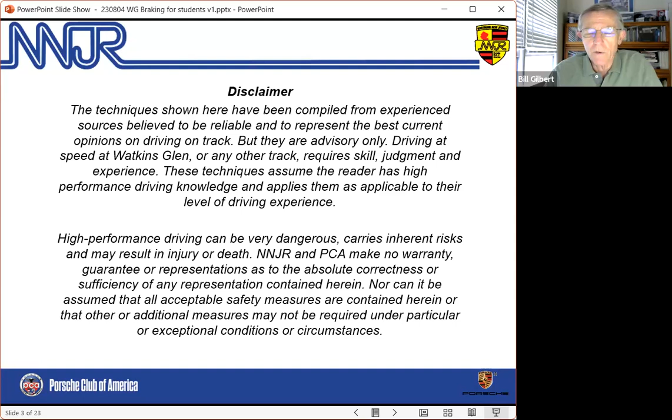Today's session is targeted for student drivers, although I'm sure all drivers will find some useful ideas here. But as always, before we get started, the caveat that everything we've put in here we think is good advice, but you use it at your own risk. Just like when we're on track, everything we do is at our own risk. So with that said, let's dive right in.

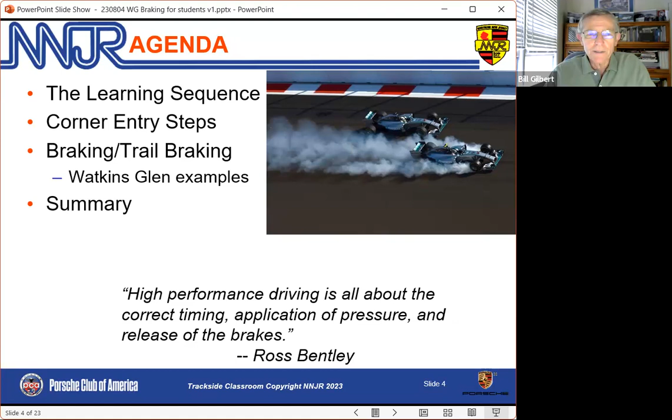Here's what we're going to talk about today. We're going to briefly talk about the learning sequence, the proper way to focus and prioritize when we're on track. Then we're going to take braking apart a little bit and look at what the corner entry steps are, and talk specifically about braking. We'll use some Watkins Glen examples today, but these techniques apply to any track. There's nothing specific to Watkins Glen here other than a couple of examples. And at the bottom, a Ross Bentley quote that's probably more applicable to those of you with more experience: braking is where the difference exists between the really good drivers and the rest. So with that said, let's get going.

This is what I've called the learning sequence - the sequence of priorities when you're learning a track, learning a corner, or even trying to get better. So what that means is that if you're a new driver, you're going to mainly focus on learning the line. And until you get the line figured out, everything else is really secondary.

Once we have the line, then we want to maximize our exit speed out of the corner consistent with safety. To do that, we find the best point to get on the gas, the throttle application point, and the best point to put our foot on the floor, the wide open throttle. And then if we're learning, the last thing we work on is braking and entering the turn.

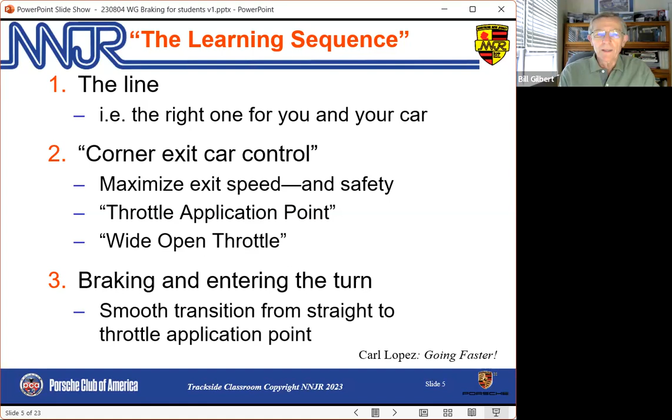So while we're talking about braking today, as if it's the only topic, it's not. In the sequence of learning, it is less important. But that said, as you are learning and you've kind of got the line figured out, there are some common mistakes that we'll explain how to avoid, and that will help you learn faster when you're on track.

So some basics I don't want to overlook: you have to be seated properly so that you can press on that brake pedal hard with a lot of force. That means your leg cannot be straight. You cannot be reaching, cannot be using your foot or your ankle - you have to be using the big muscles in the leg. For that to work, there has to be some bend in the knee, even when you're pressing hard on the brake pedal. So make sure you're close enough that you're not reaching on the brake pedal.

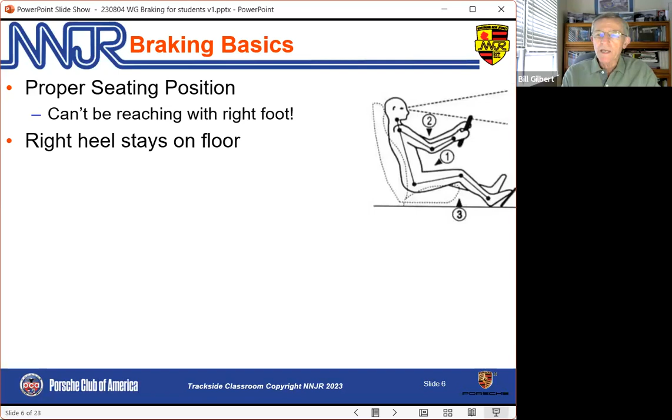Second, the right heel should stay on the floor. It should pivot between the gas pedal and the brake pedal, and that's something a lot of people don't do. If you're picking your foot up from the gas pedal to the brake pedal, A, that is slower, but B, it's not as consistent or predictable. So you want to get in the habit of just pivoting your heel on the floor. I tried to find a picture from my 968 of the metal floorboard that was in it - it was painted black, but the paint had worn off where my heel had been on the floor as I was driving the car, just to make the point.

So other basics: you're going to look for a point to begin braking, but as a beginner, you will be approaching each corner at different speeds, so that's a factor as well. And then heel and toe - if you have a manual transmission, we can't teach you how to heel and toe on track. You have to learn that on the street. And obviously, when we're braking, if we're downshifting at the same time, the heel and toe needs to be done in a way it doesn't affect that brake effort. That's much easier to say than it is to do - it requires lots of practice.

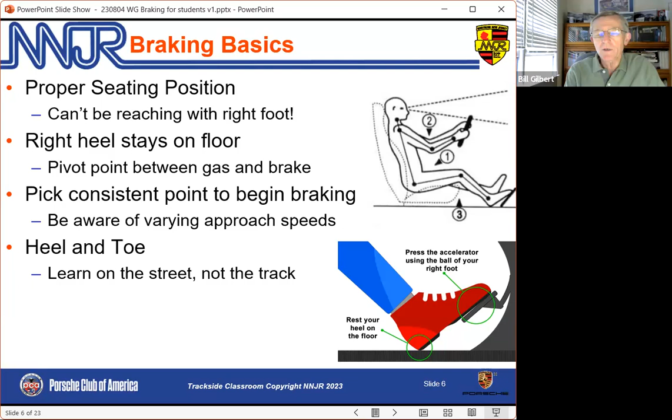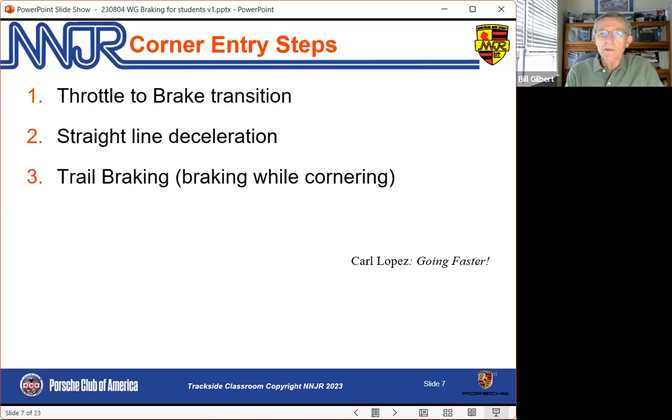So let's break down the steps involved as we think about getting on the brakes. We're coming down a straightaway. We're going to take our foot off the gas, put it on the brake. Then we're going to brake in a straight line. And then at some point we're going to turn in, and we're probably still going to have some brake effort, some brake pressure, our foot still on the brake pedal. There's a fancy word for that called trail braking, but you do that naturally now.

We all do that naturally on the street. If we're slowing down for a corner to pull into your neighborhood street, you don't think, gee, I'm trail braking into this corner. We just naturally have the brakes on as we turn the corner. And that's what we're going to do on the track as well.

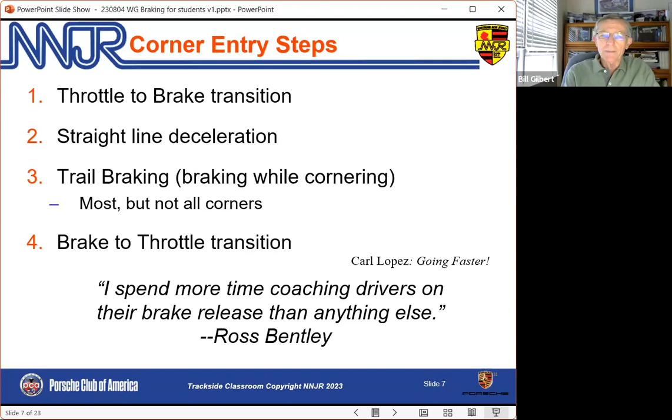The amount that we're going to use, the amount of brake and how long it's going to be on, that's where the magic is, and that's what we'll spend a little time talking about. Then last, we're going to take our foot off the brakes and go to the gas. That's the brake release that Ross Bentley talks about at the bottom here. That's where even pros practice getting better at it. So that's a really important part of the process.

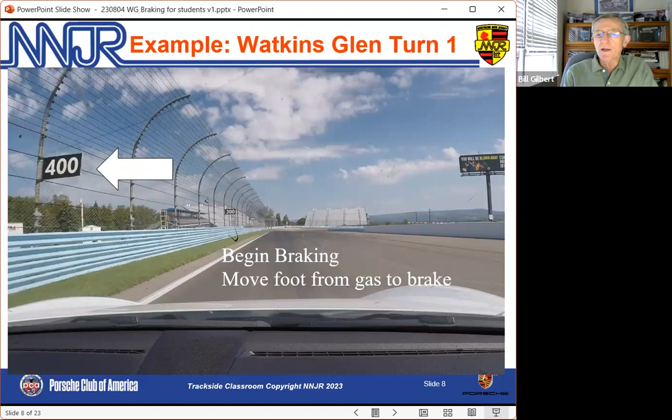So by begin braking, we're actually just moving our foot off the gas onto the brake pedal. Then once our foot's on the pedal, we're going to brake in a straight line. At some point we're going to reach the turn in, and we're still going to be on some brake. But after we turn in, at some point before the apex, we're going to take our foot off the brake pedal and start to move it toward the gas pedal, so that by the time we are at the apex, we can start to use the gas.

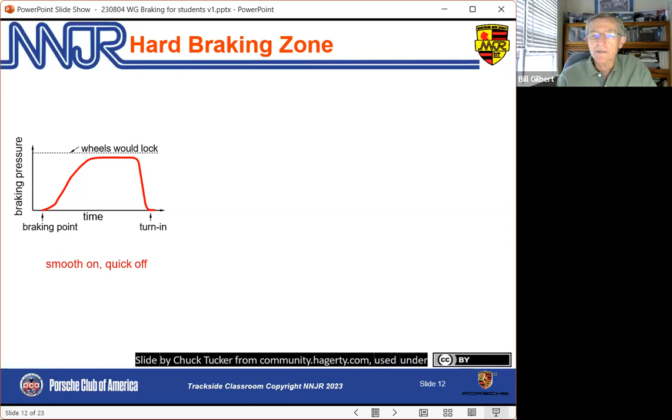Another way that's not recommended is you jump on the brakes, full brake effort, then jump off the brakes. By the way, this is a very common beginner mistake, and we'll say more about that. This less so, but still not a good idea.

This is what we want the brake effort generally to look like in a heavy braking zone. We want to get on the brakes and immediately apply lots of pressure, keep that for a little while, and then trail that off. And we're going to turn in someplace in this range here.

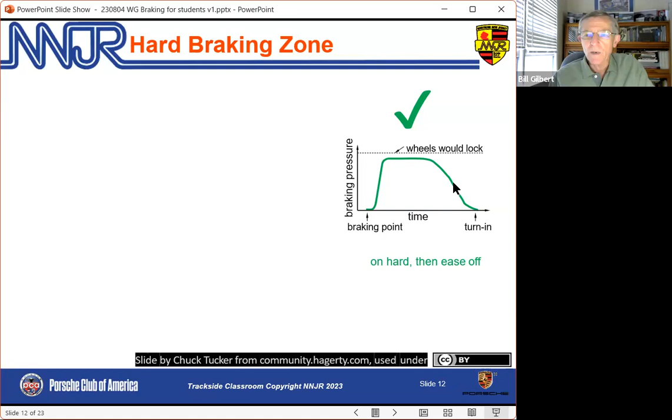So what are some of the common mistakes? Well, I already mentioned too little pressure early, too much late - that was the one graph you just saw. Another one is to jump on and off the brake pedal, as opposed to the proper technique, which is to put the foot on the brake pedal from the gas pedal quickly and press until we feel pressure, then press hard. That little bit of delay, that little bit of pressing, allows the car to squat down nicely.

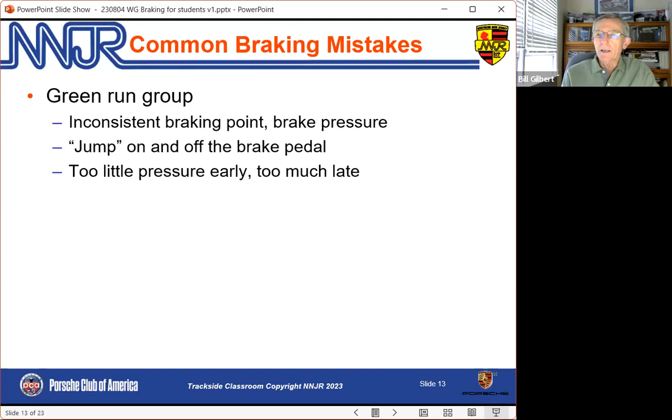And start using the effort of all four tires, as compared to if we just jump on the brake pedal, we're going to push all the weight forward and force the front tires to do all the work, and the back tires won't be able to help as much. I also mentioned inconsistent braking point, as well as inconsistent amount of braking. That's something almost every new driver needs to get better at. Now, those of you with some experience still often make some of these mistakes - not to the same extent, but too little pressure early, too much late happens even with advanced drivers sometimes.

It takes effort to break that habit. And another habit we see with experienced drivers is at the end of the braking, going from a heavy brake effort straight to a heavy gas effort. And that obviously upsets the car.

It's not the fast, or by the way, not the safe way to enter a corner. And a common mistake is to think that braking is all about braking hard and late, when in fact braking late is the last thing anyone should ever work on. I always tell people we can brake 10 or even 20 feet earlier and be much smoother and much nicer to the car, and by the way, much faster.

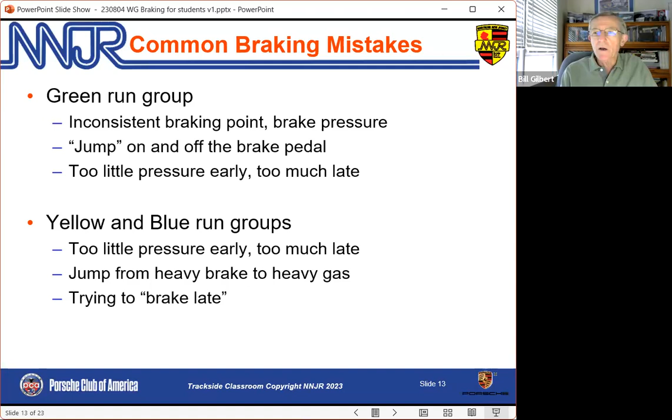So let's talk a little bit about braking at Watkins Glen as an example. Watkins Glen has no slow corners, so some tracks do, and they have their own characteristic, mainly that they need a lot of trail braking. We're going to brake a long ways into a corner. We're going to do some trail braking at Watkins Glen, but not because it's slow. It is a high speed track.

That means we have heavy brake zones in turn 1 and the bus stop, even turn 8. Those are heavy brake zones. Most tracks have at least one heavy brake zone. Watkins Glen, depending on how you count them, is a minimum 2 and maybe 3 or more.

Trail braking. Well, some corners of Watkins Glen, we are going to carry the brakes partway into the corner. If you look on the map here for turn 6, it's a long corner. Also happens to be downhill. So we're going to carry the brakes partway into the corner.

Turn 8, sharp corner. Turn 9, equally sharp. Those corners, we're going to carry the brakes in a ways because the apex is a long ways around, and it won't do us any good to get on the gas early. So we're going to carry the brakes. And the bus stop is the same thing.

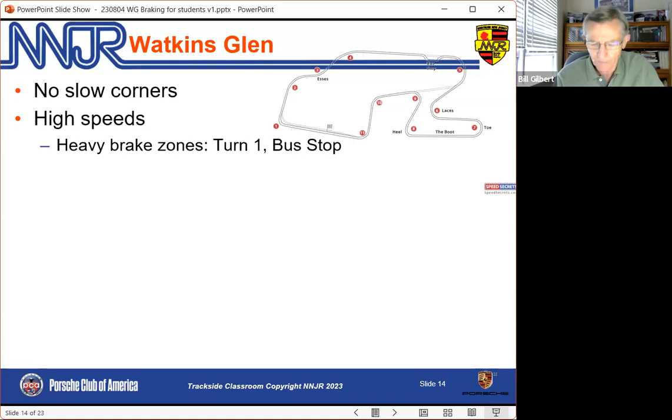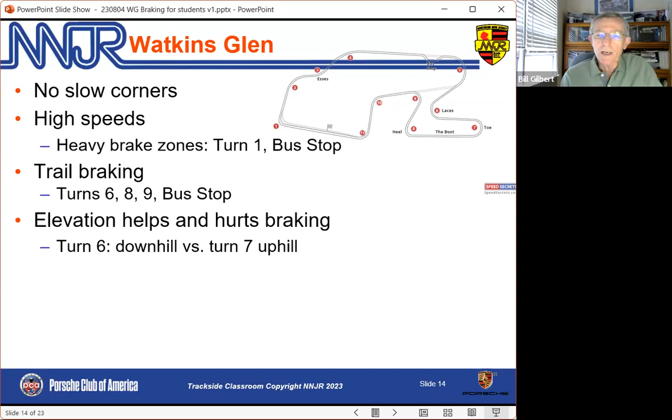Elevation at all tracks, but particularly Watkins Glen, where there's some steep hills, really helps and hurts the braking. In turn 6, I already mentioned, is downhill. Turn 7 is even sharper, but it has less trail braking because it's uphill, very steeply uphill. And so the hill grabs the car and we don't have to do much braking very long after we turn in.

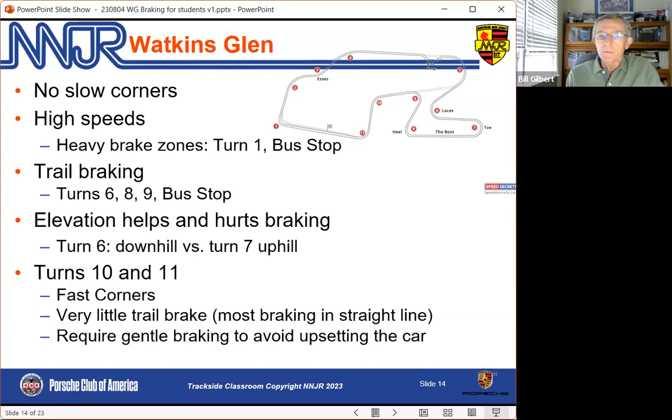In contrast, we have turns 10 and 11, which are fast corners that require very little trail braking. In other words, most of the braking we're going to do is in a straight line. And in all fast corners, we want to do gentle braking to avoid upsetting the car.

So now let's think about a way to mentally program our thinking and eventually our right foot so that we can improve our braking. And the way that we like to do that is to think about brake pressure. In other words, how hard am I pressing on the brake pedal?

As 0, meaning I'm not on the brake pedal, no effort, to 10, where I press hard enough that I activate the ABS, or if I don't have ABS, I lock up the front tires. And so the maximum stopping effort actually happens at just before ABS lockup. So call it 9.5, actually 9.9, but in any case, full brake effort is let's call it a 9 or 9.5.

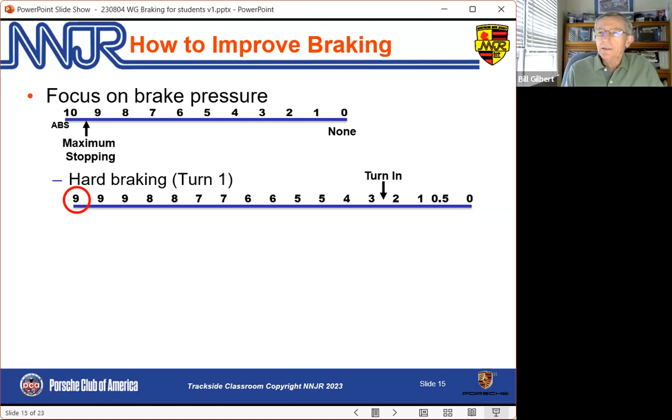So if we are in a hard braking zone, like turn 1 at Watkins Glen or Lightning or Thunderbolt or fill in the blank, here's a way to think about how we should use the brakes. Once we're on the brakes, as I described earlier, not jumping on them, but on them quickly, pressure, full pressure, right up to a 9. And we're going to stay at that 9 for a while, maybe even longer than I've shown here, but we're going to stay there for a while.

But eventually, we're going to start to taper that off. This is a long brake zone. And by the time we get to the turn in, maybe we're at a 2 or 2.5.

Eventually, as we get halfway to the apex, we're going to come off the brake pedal. This is the opposite of our natural tendency, because on the street we do the reverse. If we're approaching a stop sign or a street corner, we'll get on the brakes relatively gently, then apply a little more brake pressure as we need to slow down more. We have to break ourselves of that habit on the track. It's a good habit on the street, bad habit on the track.

This is one of those things that beginners struggle with a bit until they realize how well it works to actually use the brakes hard in the initial part of the brake zone.

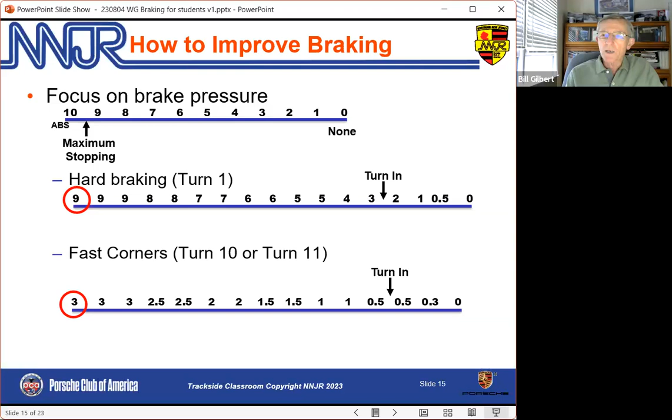So think about this 0 to 10 scale, and it'll help you communicate with your instructor to improve your braking. Now, as you get better, you can think about the end of braking, in other words the point where your foot comes off the brake pedal. As you get more experience, you'll find that the end of braking is more important than the beginning of braking, and a key point to focus on is being consistent.

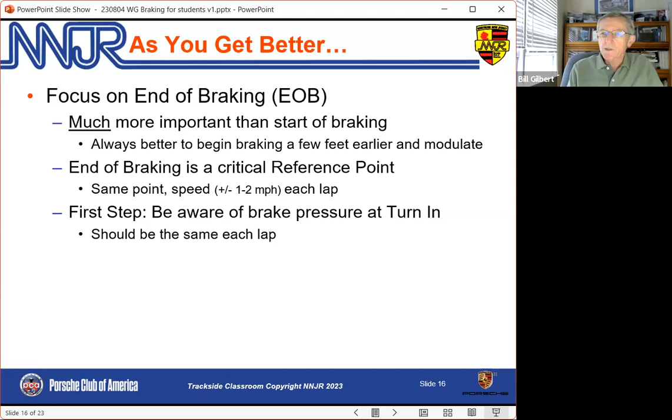Now, if you're not quite ready for that, and it is something that takes quite a bit of experience, I strongly recommend those of you in yellow and blue focus on how much brake pressure you have when you turn in, and focus on making that consistent. So if I'm trying to turn in at a brake pressure of 3 at turn 1 at Watkins Glen, let's try to make it a 3 on every lap, whatever your particular objective is, but let's make it consistent. That will pay you big dividends as you move to transition from the brake to the gas.

So let's take our turn one example again, and now let's overlay what the brake pressure looks like from a real braking zone. This is a real brake pressure trace from the brake zone at turn one.

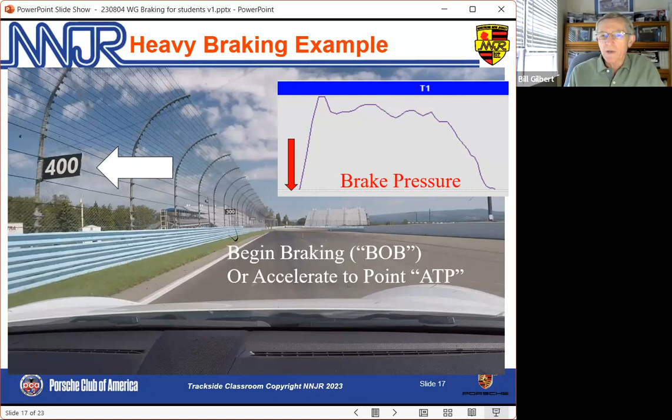Exactly where the arrows are is approximately right, may not be exactly precise, but as we showed before, if we begin braking at 400, that really isn't our beginning braking point. Yes, we tell ourselves it is, but really our foot should have been on the floor until this point. So it's really the accelerate-to point. Thank you, Peter Krause, for that term, which means at the moment where we decide to begin our braking, there is no brake pressure because our foot just came off the gas pedal and is moving to the brake pedal. So the car is going to travel a little ways before we start to get some brakes.

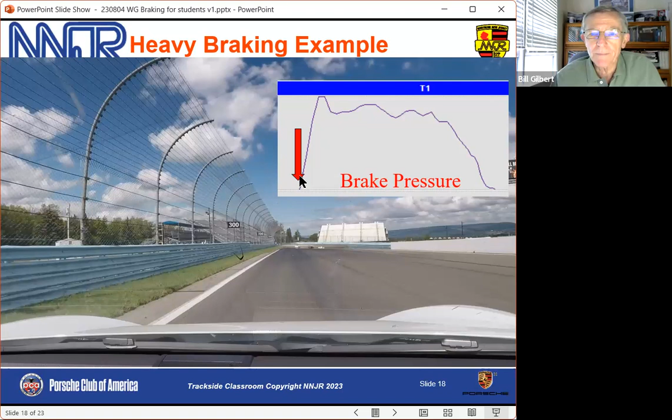Down the track a little bit, now there is brake pressure being ramped up because the foot is on the brake pedal and pressing. By the time we're into the brake zone, there's lots of brake pressure. It's not a perfectly flat line because most of us aren't quite that good with the brake pedal, but you see very heavy brake pressure for a long ways in the brake zone here. That's exactly what we would expect to see in a braking zone like this one at Watkins Glen.

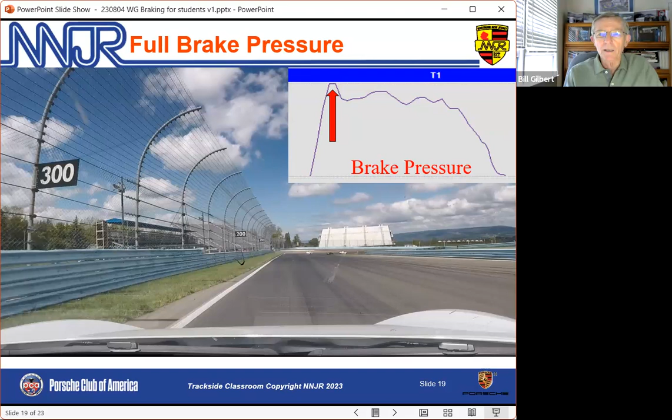But at some point, obviously, we have to prepare to turn in. We're not at the turn in yet, but we have to get ready, and that means the brake pressure needs to start to trail off.

And now we're well into the brake zone, thinking about getting ready to turn in. Just as importantly, if you have a manual transmission car, this is the point where we're going to downshift. The downshifts shouldn't happen early, they should happen late in the brake zone, but before the turn-in point, so that all of the effort associated with the downshift is completed before turn-in.

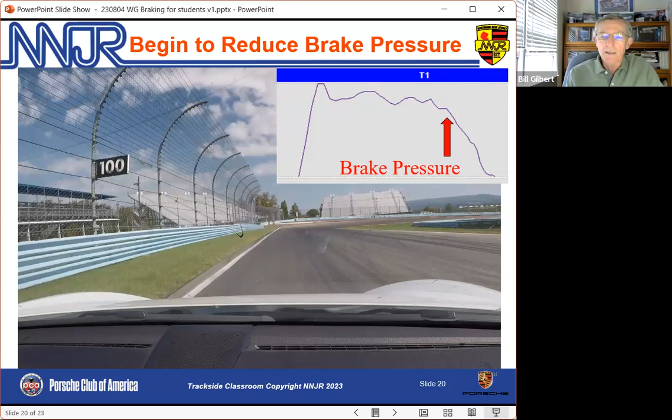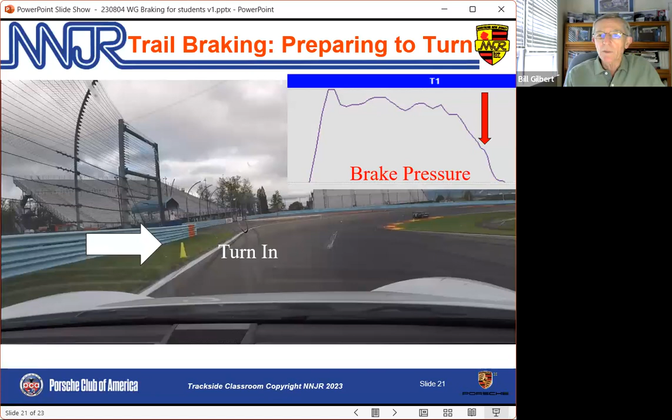So this last part of the brake zone can be quite busy if we're downshifting and getting ready to turn in. And of course, when we get to the turn-in point, we're still on some brake pressure. You see the red arrow as to approximately where we are here, showing that 2.5 or 3 effort we talked about before at turn-in.

And then when we get to the end of braking, now the brake effort is down again to zero, and you notice a nice gentle trail off of the brake pressure as we're trying to make the transition from the brake pedal to the gas pedal nice and smooth.

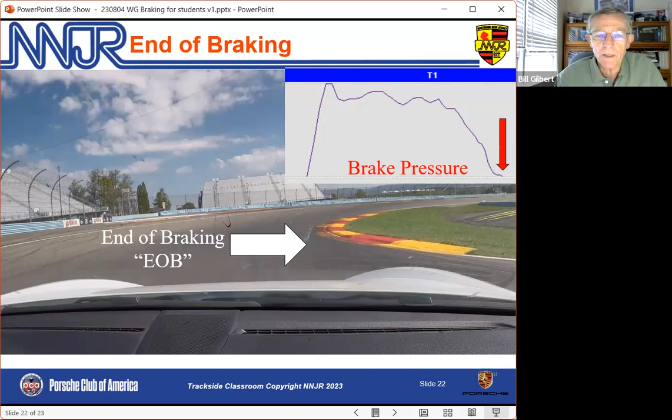So with all that said, let me just summarize what we've just talked about. It's really important to learn the proper track braking technique - the basics, the seating position, the heel pivot. Your instructor will work with you on that, but if you're new, those are really important to get nailed from the beginning.

And learning the hard initial brake, gentle release that I've emphasized here - if you're a beginner, that's something to really focus on. If you have experience, you need to continue to focus on making sure you're consistent at it and work on that gentle release part.

And a way to think about the brake zone - this came from one of our guest pro speakers - he said think about the brake zone in thirds. The first third is for slowing the car; most of the braking is going to happen in that third. And while that literally may or may not be true, it is conceptually true, and in actual fact, a very large proportion of the slowing does happen early in the brake zone.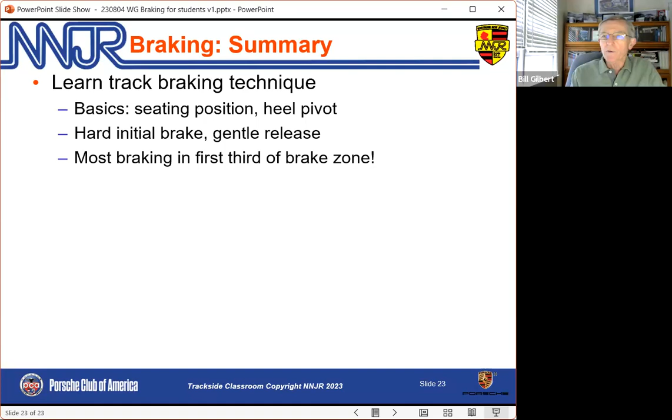He said the second third is for downshifts and getting ready to turn in, and the last third is for coming off the brakes. So if you're a beginner, that may or may not compute, but if you have some experience, that should compute. Either way, this is another way to reinforce why it's important to use that strong brake effort early to get the car slowed.

The amount of trail braking - in other words, how far we carry the brakes into a particular corner and how much brake - varies a lot by each corner and each track. It's affected by elevation, corner length. Generally, the longer the corner or the sharper the corner, the more trail brake. But that can be affected dramatically by elevation.

And as you get better, as I mentioned, focus on the end of braking, not the beginning of braking. Work on that smooth transition off the brake onto the gas. The goal is so that if I were to ride with you, I couldn't tell when your foot came off the brake pedal and got on the gas pedal.

And by the way, that aspect of braking you can practice on the street. You can practice coming up to a stop sign and gently feathering the brake effort down so that the front end of the car doesn't pop up when you stop. Most people come rolling up to a stop sign, hit the brakes hard, and the car bounces on the front suspension a little bit. Well, try to do it so that doesn't happen, or that you minimize that. That will improve the sensitivity in your right foot, and that'll pay big dividends on the track.